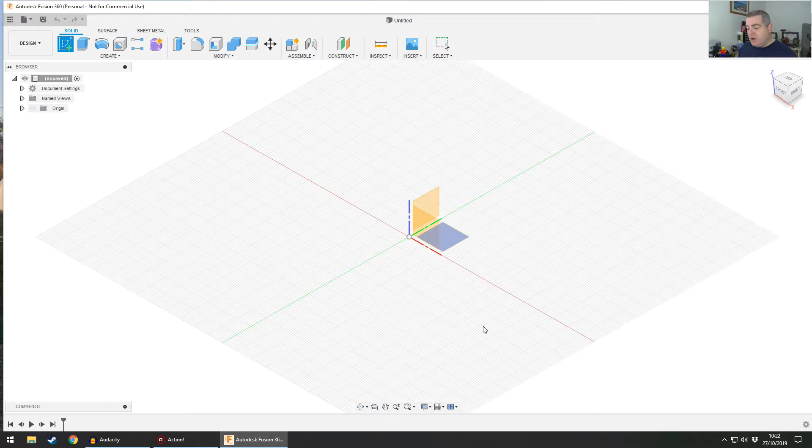So, as we learned yesterday, the first thing we need to do is sketch on any plane. Doesn't really matter, I'm going to choose this one today. And I'm going to choose a rectangle, and a rectangle is 2 points, so we click and click, and that's it. Now, different to the last video, we're going to start using this sketch dimension button. You can press D on the keyboard to get that up, or you can also press S on the keyboard. That's S for Sierra, and it brings you the shortcut menu, and you can pick dimension from there.

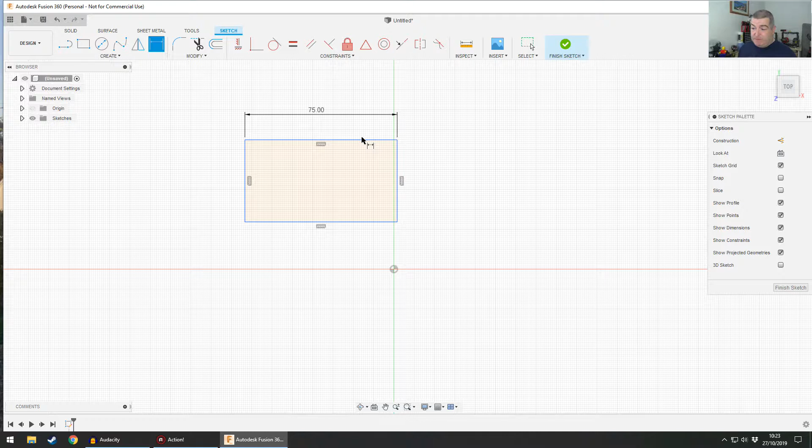So I'm just going to click the line, click the dimension, and then type in 75. That'll do. And then, you can see by the little symbol next to the cursor, we're still in dimension mode. So we click again and we click again, and there we're like 50, no, not 520, 50. There we go. And we've got this rectangle, and then I'm going to press escape to come out of dimension mode, and I'm going to finish my sketch there.

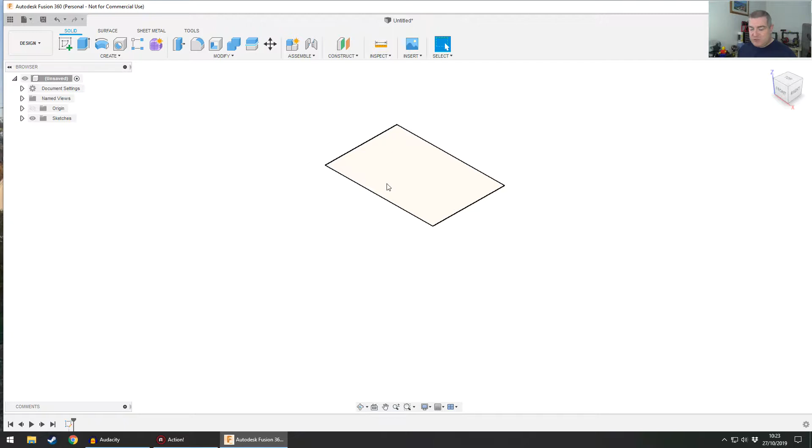Now you'll notice I just shoved that sketch anywhere. It doesn't really matter what you try to do with this stuff at this stage. Maybe in a minute we'll talk about that, but at this stage, who cares, right? So we're going to extrude this because we need to give it some height, and I'm going to give it, say, like 30 millimeters. So we can type that in there, or we can click on the dimension here and type it in. You can do whatever you want, or you can just drag it up and type it in.

So now we've got a brick, maybe, yeah? I'm going to call that a brick. And it looks really, really crappy. Okay, fair enough. So what we do next is we want to hollow this thing out. Now there's a couple of ways we can do that.

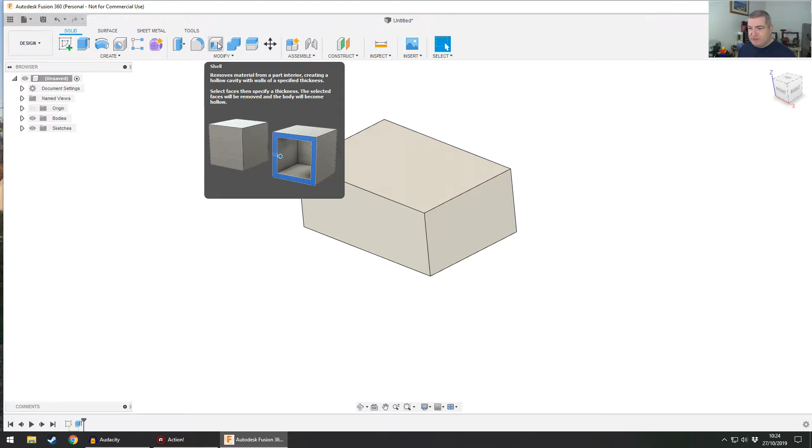We can press this button here that says shell, and if you hold over it, it basically says it'll remove material from the interior part. So we hit that, we literally say that face wants to be removed, and I want the wall thickness to be, say, 3 millimeters. And hey presto, we've now got a box which has all the walls of 3 millimeters, which is quite nice. And if you look down here, you can see we've got a little shell, which is pretty cool, but not really that impressive.

So one of the nice things you can do with 3D CAD, this is across the board for any 3D CAD software which is structured, you know, SolidWorks, Pro Engineer, Inventor, Fusion.

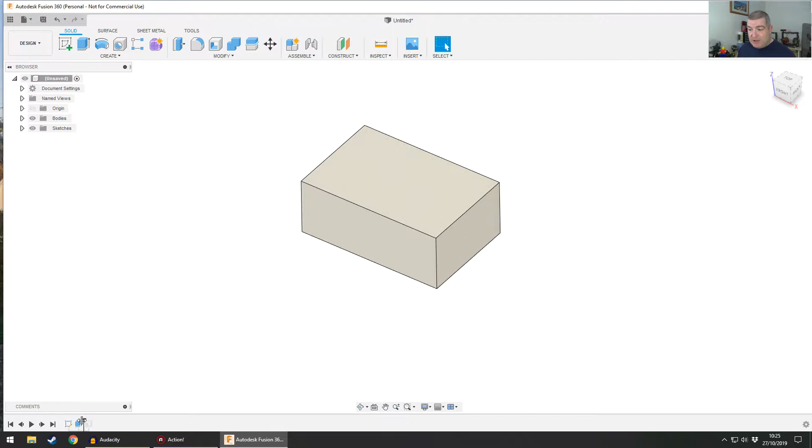We can take the rollback bar here, and we can slide it back, left click and drag it back, and we can temporarily remove the shell from the timeline or feature tree or whatever you want to call it. So let's say I wanted to round the corners of this box off before we apply the shell.

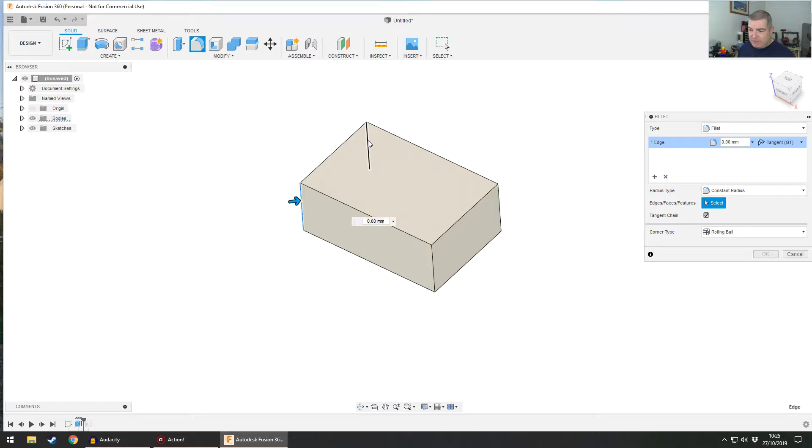We use this tool here called fillet, and all I'm going to do is I'm just going to click. If you point at a line that's hidden, you don't have to turn the model around. It will allow you to click through the surfaces, which is quite nice. I'm just going to click all those 4, and I'm going to drag this in, and you can see what happens. We're going to round off the corners. And I'm just going to do a generic 5 millimeter round.

Now, if I then take the rollback bar from the bottom left and drag it back and bring the shell back into play, what you'll notice is the shell has now incorporated this round in it. And that is why you have structured CAD and parametrics and all those buzzwords that people use. It basically just means that whatever we build in this line starts left to right, and the things on the right depend on the things from the left.

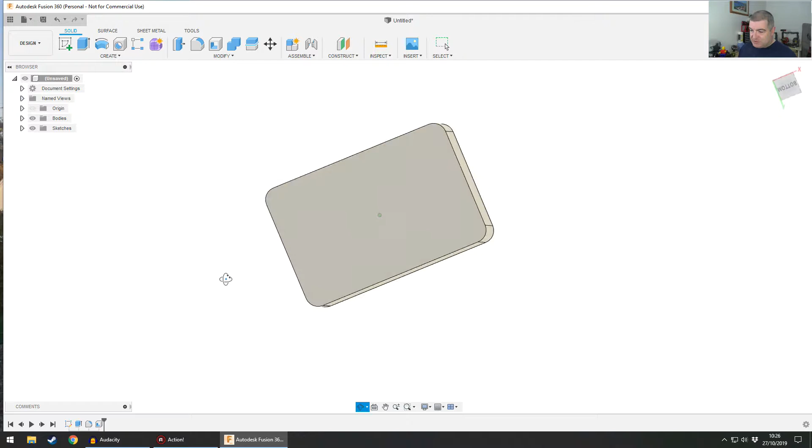So we've now got our box, but it wouldn't really be much of a box if it didn't have a lid. So to attach a lid, we're probably going to need some kind of lip to allow it to slot in. Now, the way I'm going to do that is I'm going to click sketch, and I'm going to sketch on this face here. It should turn blue. There we go. And it turns it around so we can see it. Now, I don't want to have to literally sit there and go, okay, line, curve, all the way around here, because that's just going to be tedious and shitty.

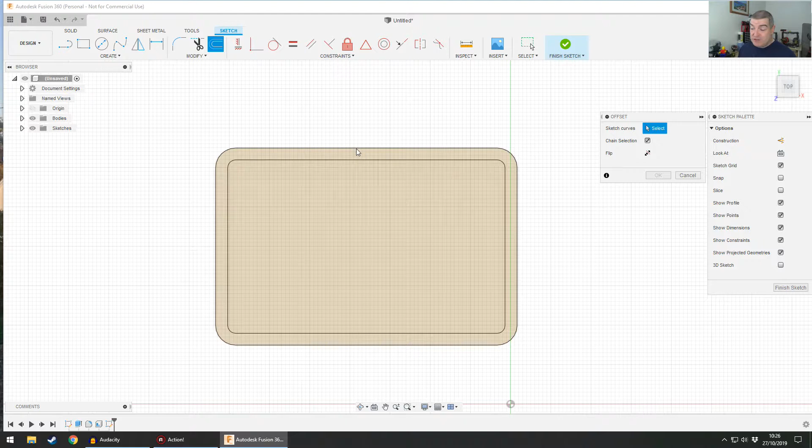So there's a command here called offset. It's next to the scissors that we used last time. So I click offset, and then I click one of these lines. Doesn't matter whether it's the inside or the outside, depending on how you want it to be offset. If I click the inside one, I can then drag this, and it will literally take the geometry from the line I clicked, and it will offset it by a value.

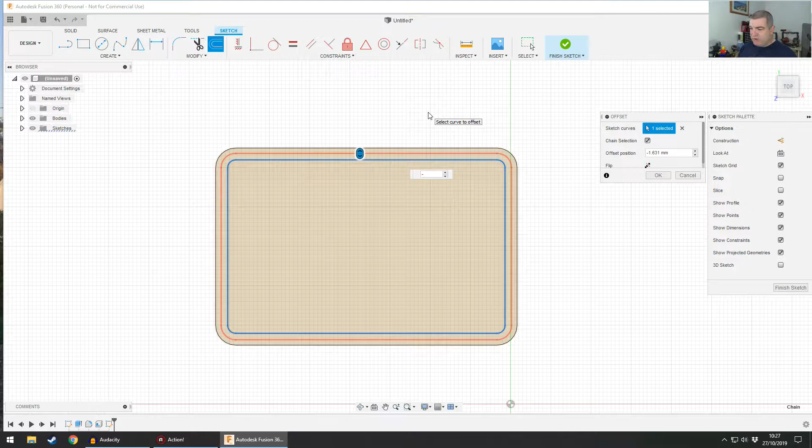Now I want to go this way, and for some reason this way it's a minus value. Thanks for that, Autodesk. And there's a flip button here that we can press to flip it, which just takes the minus value away. But for some reason the direction I want to go is minus. So I'm just going to type in minus, if I remember rightly, that was 3 thick. So we're going to do 1.5 to go halfway, and then we see we get a little automatic dimension added.

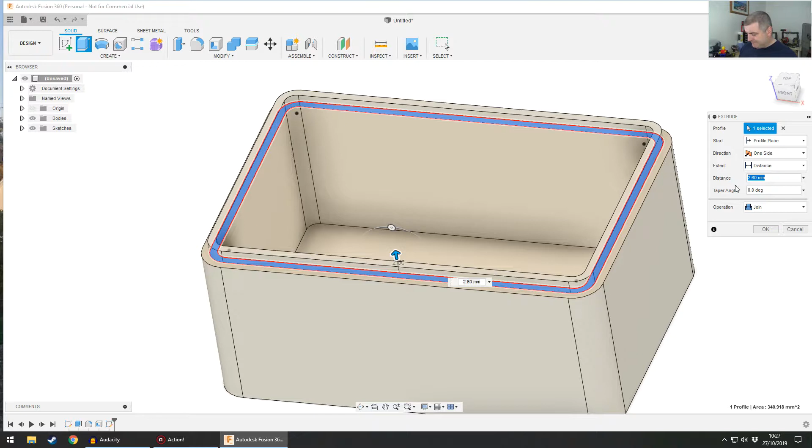Okay. So if I just click finish sketch and then extrude, what we learned last time again was we can pick either one of these regions to extrude. So I'm going to extrude the internal one, and I'm going to extrude it up by like 2 millimeters or something. The design for this box is just in here. I'm just making it up as we go. You can do whatever the hell you want with your box, and you'll get somewhere pretty fast. You can see there our model tree has like 2 sketches and 4 features in it, and we've got the bottom half of our box, which is pretty nice.

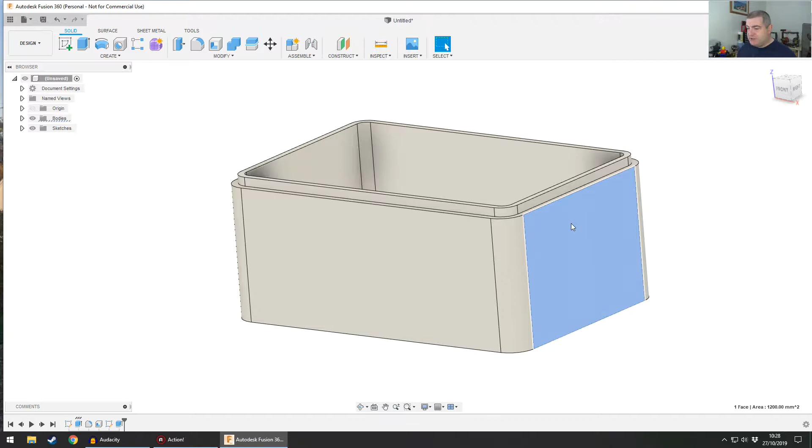Now, I might want to put some kind of latch mechanism on here so that when you attach the top of the box, it clips in place. And how am I going to do that? Because we said last time you have to click on a face to sketch on it, and there's no face in there that I can click on. Now you can do a couple of things.

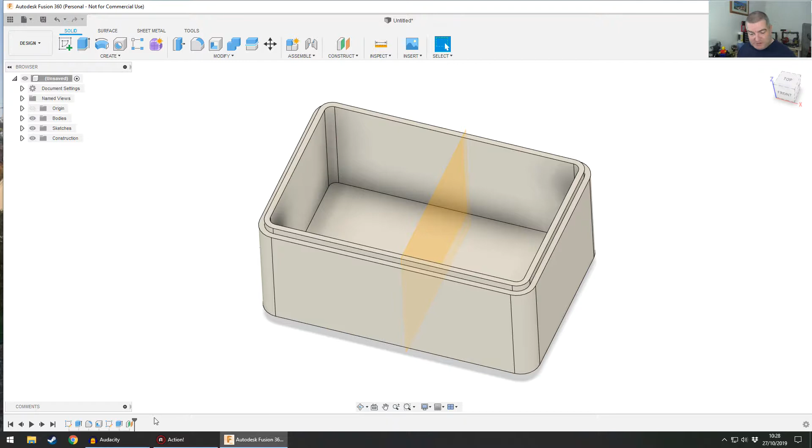So to take the mathematical equation out of this, what I'm going to do is I'm going to go back to my very first sketch. Remember that one? We just did it a couple of minutes ago. And if I do edit sketch, we can see here that this rectangle is blue, and it's just chucked in somewhere in the middle of space. And if I grab a hold of the corner, you can see I can actually move the entire rectangle round in space, which is probably not that great in this occasion.

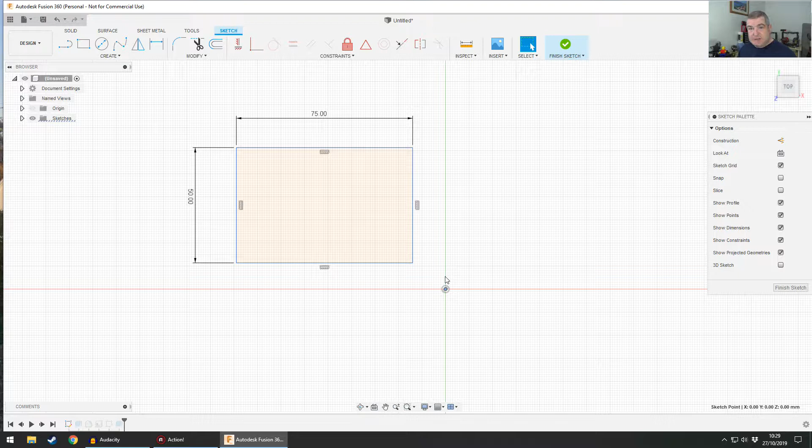This dot here is what we call the origin. Now, we have the 3 planes, the front, the side, and the top. And where those 3 planes intersect, that point is called the origin. So that is here. So we can imagine that this green line is one of those planes, and this red line is another one of those planes. And if I was to spin it round, and if there was a 3D line sticking out here, that would be the other plane. So what is probably the best idea with this box is to put the rectangle so that the dot is in the center, right?

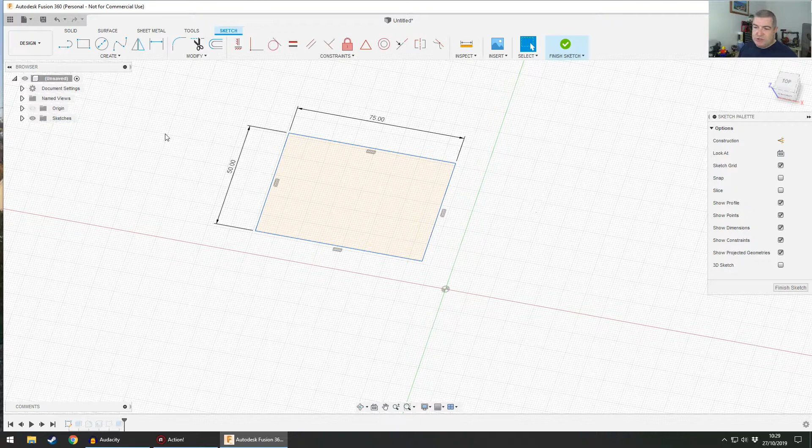And what we can do is we can draw a line from the corner to the corner of the rectangle. Press escape to end that command. And I can click that line, and over here on the right hand side I can click this construction button. And what the construction button is, it turns the line dashed. And that doesn't split the rectangle into 2 regions. That just allows us to use that line to line stuff up.

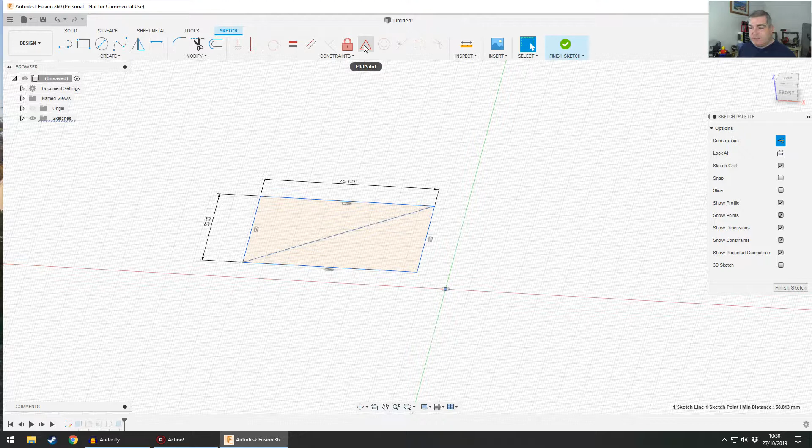Now if I click that line again, hold down shift and click the origin, what you'll notice is we get this triangle constraint called midpoint. And if I click it, what it does, I'll just turn the view around so we can see. What it does is it allows us to put the exact middle of this line onto the origin. So we've now got our box exactly where we want it in space.

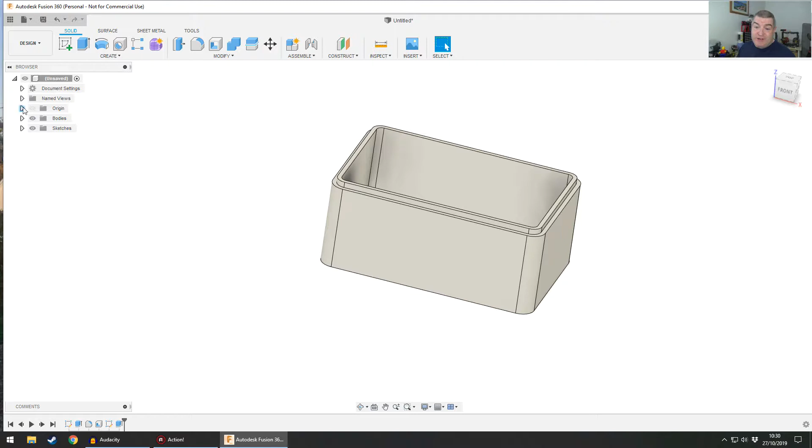Now if I just end the sketch, you'll notice that absolutely nothing has happened. So that was totally useless, right? Well, wrong, actually. What we've done, if I expand the origin and I click on these planes, what you'll see now is that our plane is exactly through the middle of our box.

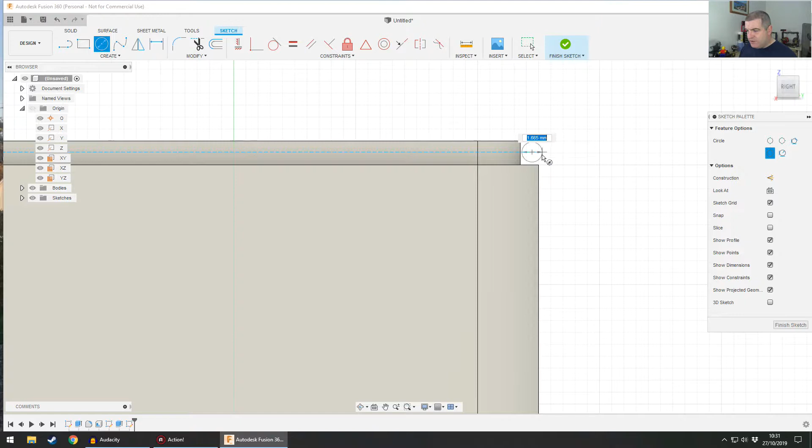So I can sketch on that plane and it turns the box around, but if I go up here and I go circle, well, somewhere there, and then somewhere there, you see that dashed line that appeared? That's like literally relating the two circles together. So it's clever enough to do that.

But what I really want to do is I really want to select one of the circles, hold shift, select the other, and say horizontal. Can't. Maybe it's already applied. No, it's not. Ah, you've got to hit the center of the circles, of course. Autodesk. And then hit the line of the circle, and then the line of the circle, and say equals. So what we've got now is we've got two circles. I can't move them. And they're the same size. They're all linked. Parametrics is great.

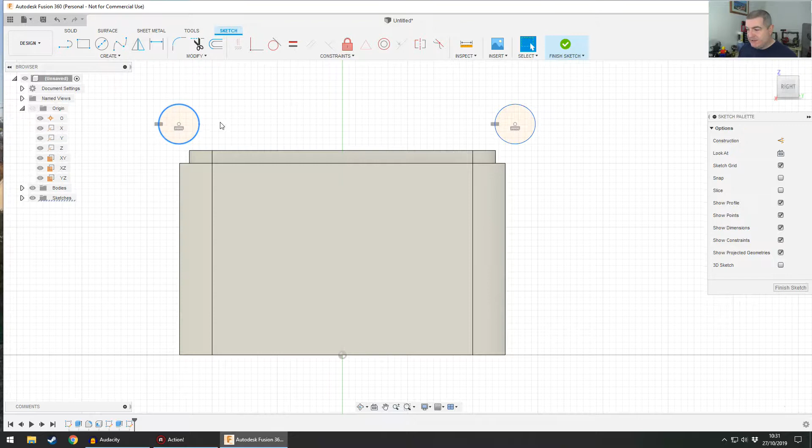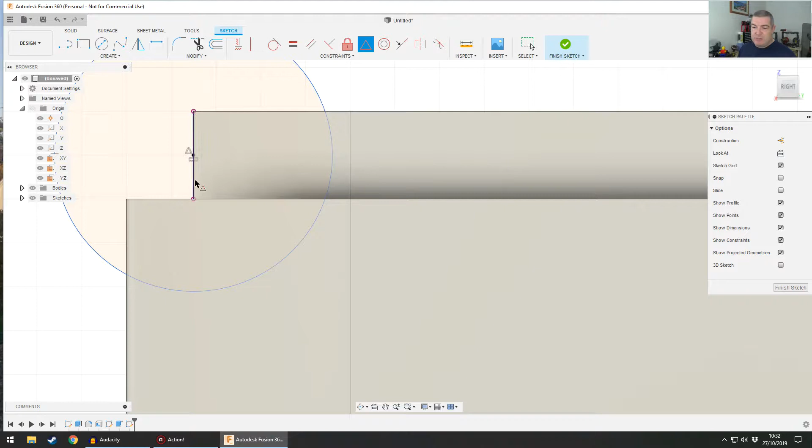Now what you might find is we can click this line here, but that's not a line, that's just a face. Well, when you look at the end of the item and it turns out a line, you can then use that line and we can do midpoint on it. You see you get these like weird kind of purpley pinky circles. That's what we call temporary geometry. So that's just literally Fusion saying, okay, I'm going to use this temporarily because that's what you want.

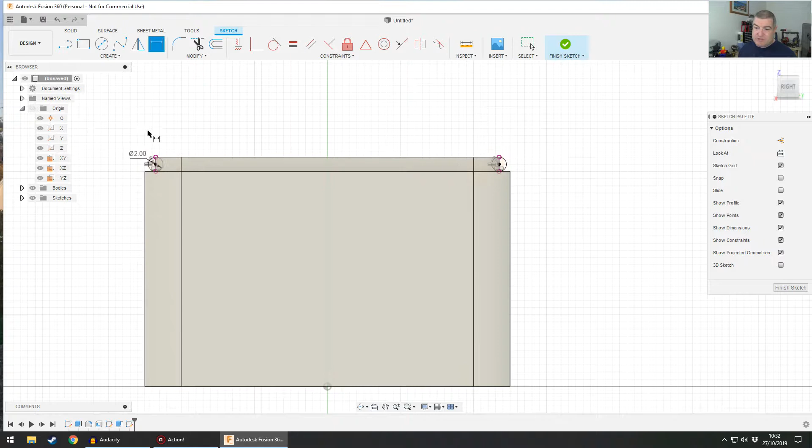And I'm going to go across to this side and I'm going to do the same on here. So I'm going to go there and there. Nice. So now the only thing that we can't do is move the lines. The only thing we can do is change the size. Now I'm going to press D and I'm going to add a dimension for that line and I'm going to make it like 2 millimeters in diameter. That's too big. Double click the dimension again, make it 1 millimeter in diameter, and we get this little circle here.

Right, okay. Now if I click finish sketch and turn it around, what you'll see is that is exactly what we wanted. We wanted that sketch to be on the center or the middle of that face. So we can of course go back in and we can extrude these things out. I'm going to click them both and I'm going to show you what happens.

So if I get a hold of this extrusion line and drag it, I hope you can see that we've got some geometry coming out in one direction. Now that's good, but we might want it to be kind of equal in both directions, using this as the midpoint. So what we do is instead of having one-sided, we can go to symmetric.

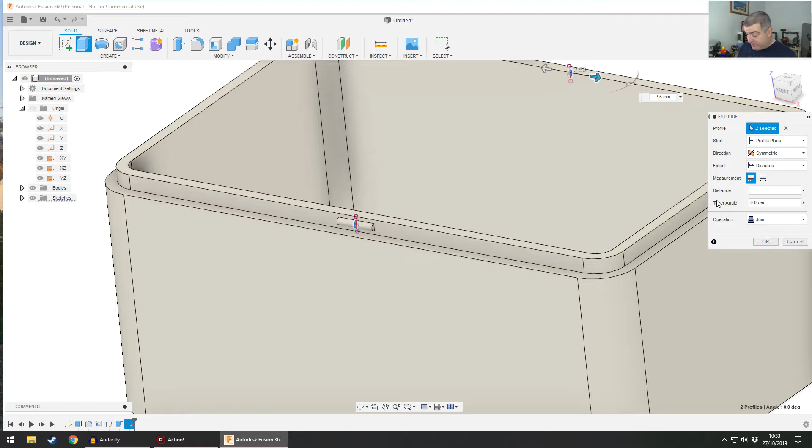And what we can see now is that it's extruding one way our dimension and it's extruding the same amount the other way. So if I wanted this to be a 5 millimeter feature, I would change that to 2.5 millimeters, or 5 divided by 2, and we get this little cool feature in here.

So when we create our very first sketch, I'll just edit that sketch so we can see it. It might be important where the origin is. Okay, this is all what we call design intent. It's how you intend to use the geometry and use the base features, the origin and those original faces, those original planes, how you intend to use them within your model.

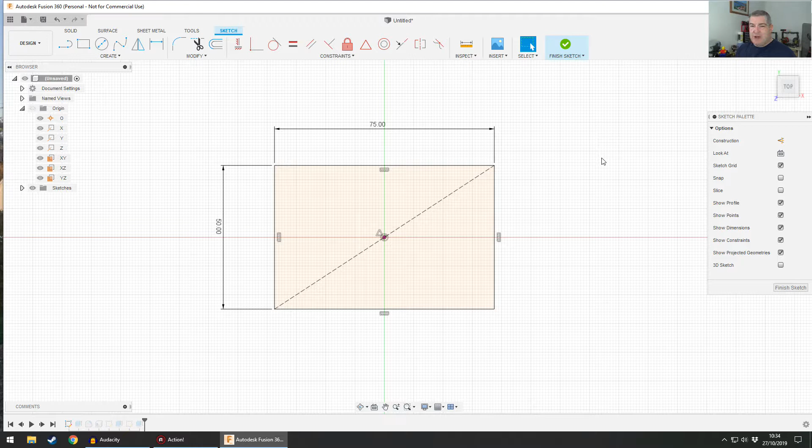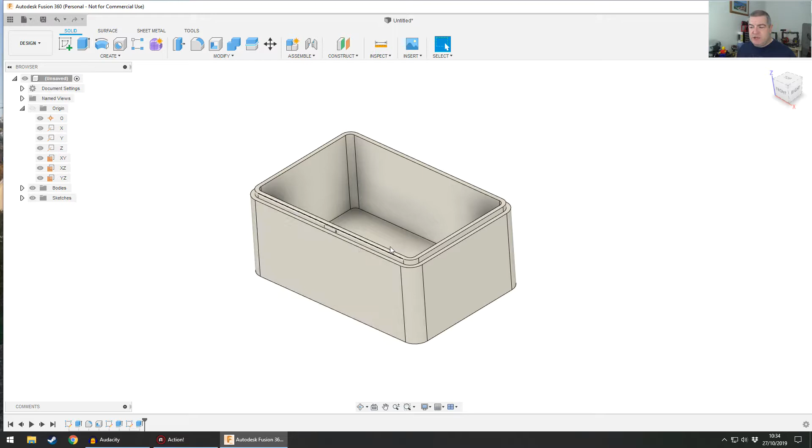Now you may do what we've just done and you may think, all right, I've created some stuff and I need to go back and change it. Well, you can do that. You just saw we can do that. Not a problem. So we've got the bottom half of our box and we can now 3D print that. It might be nice if the box had a top, and it might be nice if we could have the top of the box in this model so that we could see if it all fits together, right? Okay, so I want to create the top of the box.

So what I'm going to do is create an assembly. Now, Fusion is a little weird with assemblies because in every other CAD package you use, you create parts and you save them out and you bring those parts in and you amalgamate them as an assembly and you create relations between the assembly. Fusion's different. You create all of your parts in one piece of space and then you constrain them together. So we're going to have a go at this.

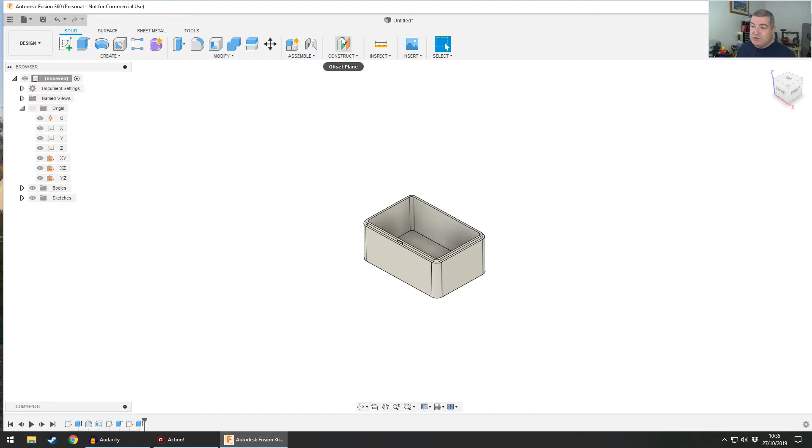So what we need to do first of all is we need to say to the assemble menu, we need to have a new component. So we need to identify this as a new component. We press OK, and you'll notice over here we now have component 1. Okay, I'm just going to go back up to unsaved, which is the actual file. I'm going to reactivate that by clicking the dot so that if you activate component 1, whatever you create is part of that component.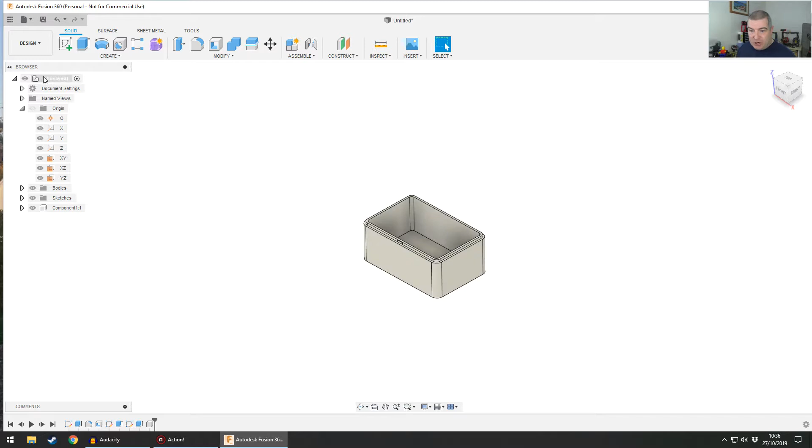Honestly. So you have to go back to the top and activate the actual file that you're working with, and then you're not creating things in that component, so we're going to create another component. That doesn't make any sense. I know, it's just the way Fusion works. It's crackers. Anyway, I'm going to create another sketch.

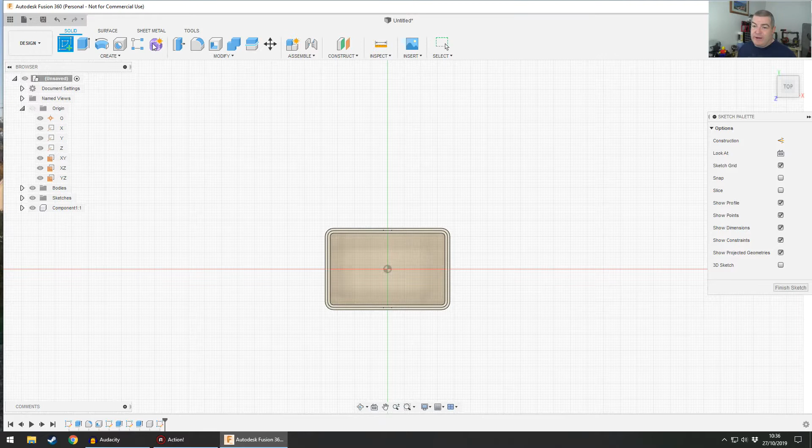I'm going to put it on this bottom plane, and it's going to be, you guessed it, a rectangle. I'm going to shove it up here. I'm going to press D, and I'm going to give it the same dimensions. You can relate these dimensions together if you really want to. I'm not quite sure why you would want to, but you can. What I also need to do is create this around the origin as well, because we need to reuse that center plane, but I'm going to do this slightly differently.

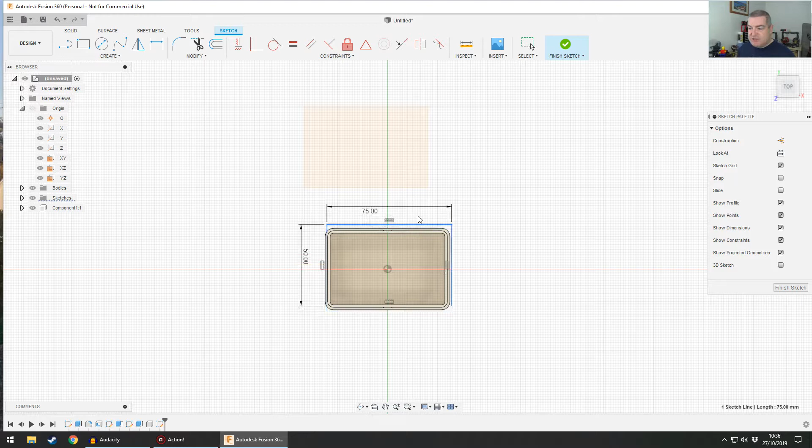I'm going to draw a line from the origin up to the midpoint. You see the triangle appeared there, to the midpoint of that line. I'm going to make it construction by clicking the construction over there, and then I'm going to make it vertical. So again, that has made it vertical with respect to the origin and the planes, because we might want to reuse that plane. The height from the origin, I don't care. I'm not really bothered. So I'm just going to leave it.

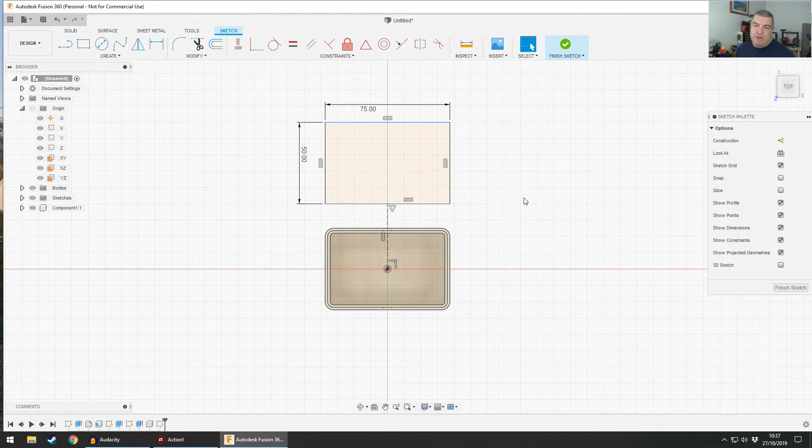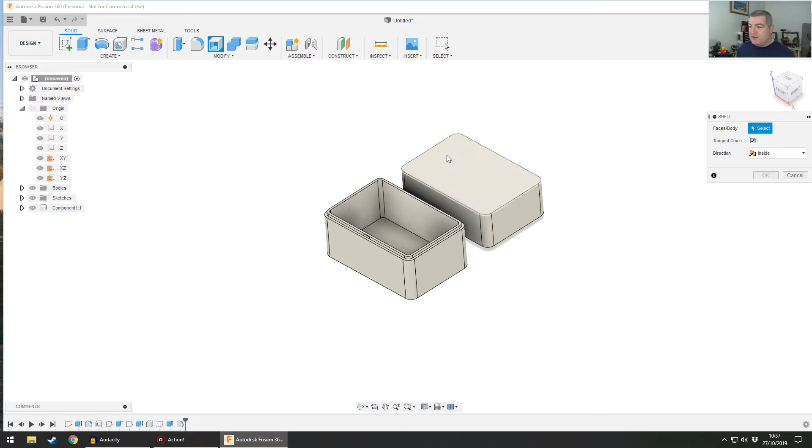So we finish that sketch and we do yet another extrude. Let's choose that region and let's go like 25 mil. Let's add our fillets to the outside again. I think, if I remember correctly, our fillets were 5mm. And let's shell it again. Or let's not shell it. Let's do it a different way. Let's sketch on the top. And let's offset that outer sketch inboard, which was a minus number for inboard this time. Thanks, Autodesk. Minus 3mm.

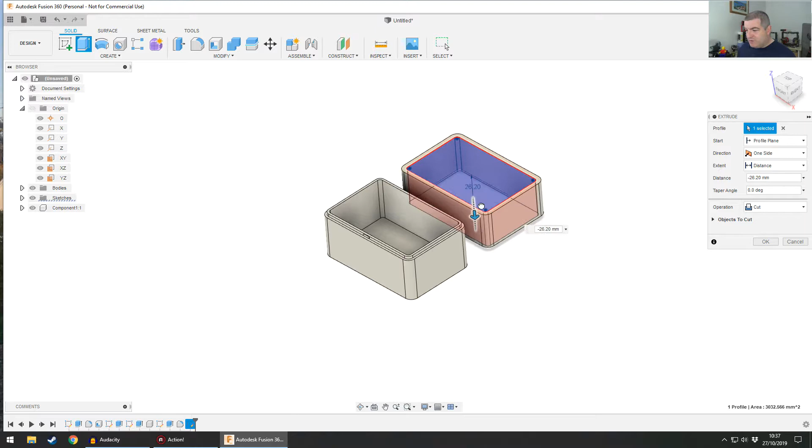And then let's extrude that down over. Now what you'll find is you can go right through and cut a hole straight through your box.

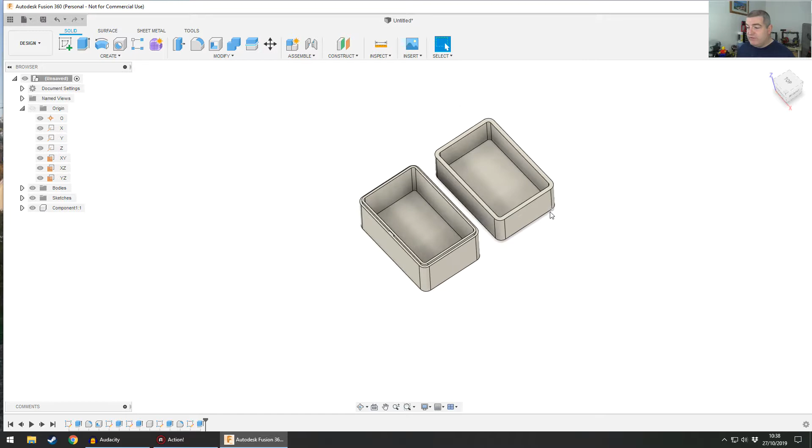So what you have to do is remember what your original dimension was, and it was 25. Take away the 3mm we want for the wall, so that's going to be 22. So we do minus 22, and that's just another way of creating a hollow box. It's not quite linked parametrically the same way as shell is, but hey, who cares?

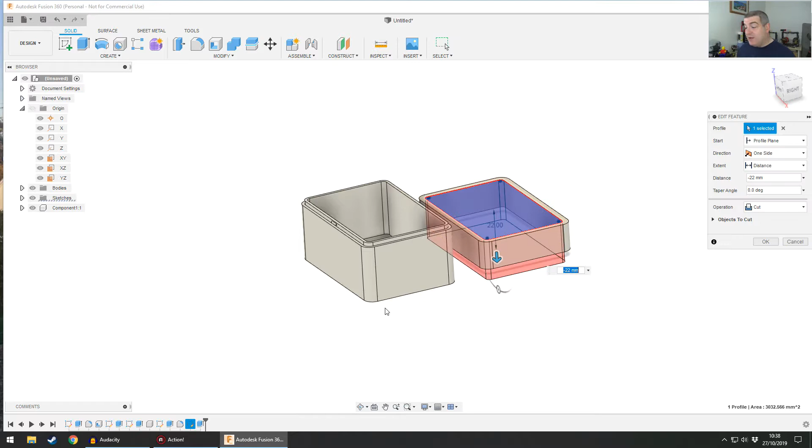I'm actually looking at that thinking it's a bit too thick. So what I really want to do is go back to there, edit that feature, and let's just go for, say, 15. Oh look, we've cut a hole in it. So we go back to our cut, edit that feature, and say minus 12. Welcome to the world of 3D CAD.

It's awesome. So what I need to do now is sketch on the top of this lip. And if I remember rightly, this one was on the inside, so this one probably wants to be on the outside. So we're going to use offset again, and go minus 1.5. Finish the sketch.

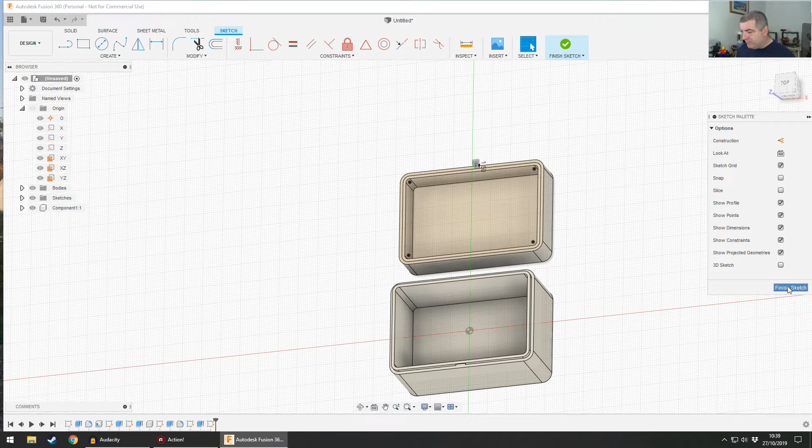And I'm going to extrude that up, so it's the outside region this time. I think it was 2mm again. Yeah, that looks okay. So now we've got a lid for our box.

And we need to add, you know how we added this little lip feature here? We need to add a little groove to put that in, right? Well, let's see what happens, because this is going to be a little more interesting now.

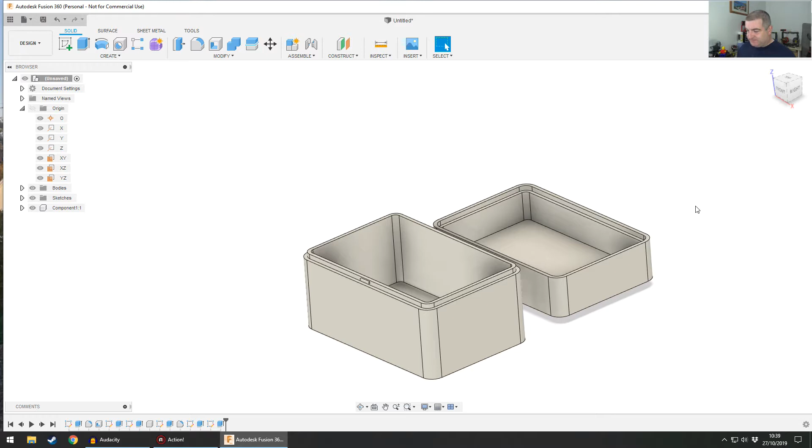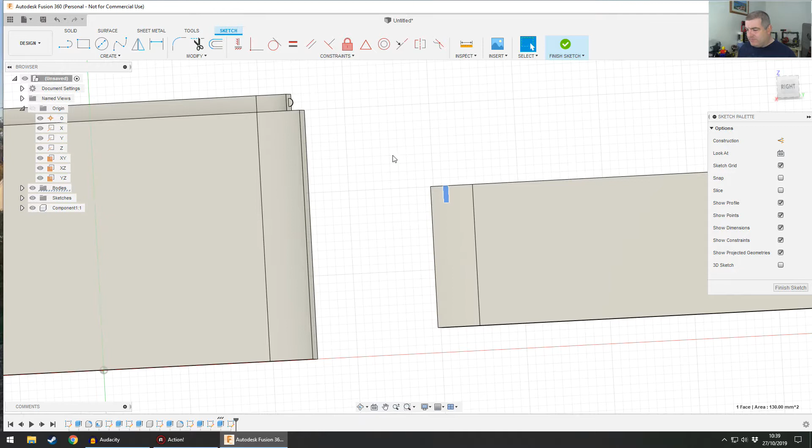If I want to create the groove, I need to create a sketch on that plane, because we said we wanted that sketch to be on that plane. But we can't actually see where we're drawing anything, because there's stuff in the way. We want to be in here somewhere, on there, and we can't see it. So if I just finish that sketch, it's blank, but we'll edit in a second.

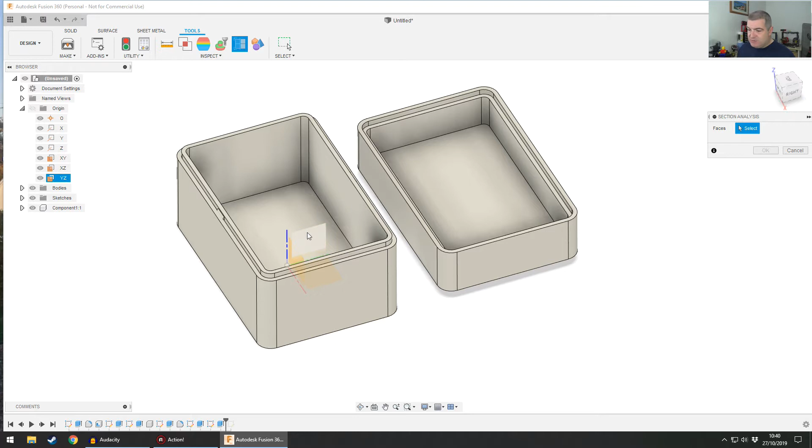And I move that back to there. What we can do is use the tools menu, and use something called section analysis. In every other software I've used, this is called cross section, but in Fusion it's called section analysis for reasons that can't be fathomed. We just click the button, and then click the face or the plane. Or we can cancel that and click that face there.

And you can see, if I press OK, we can now see what we're supposed to be doing. So if I bring that sketch back into play and edit it, we can create our circles. I'm just going to create these circles the same way as I did the last one.

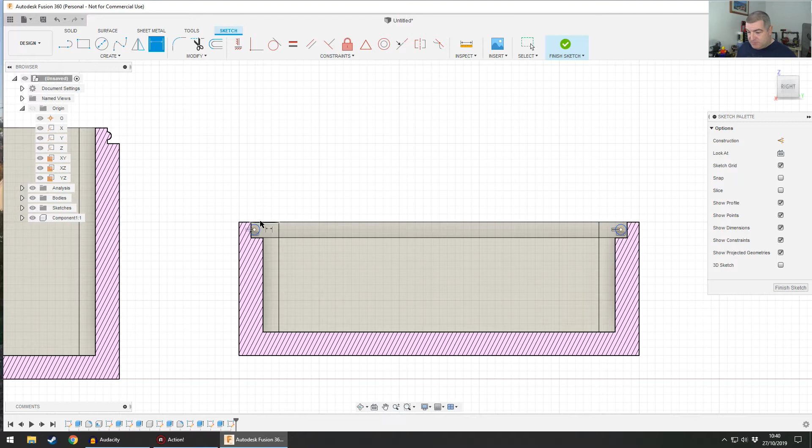Let's have those horizontal, let's have them equal, let's put a dimension on them. I think it was 1 mil, wasn't it? And then let's put the center of that on that line, and you can see now that we're in section view, we can reuse that line again.

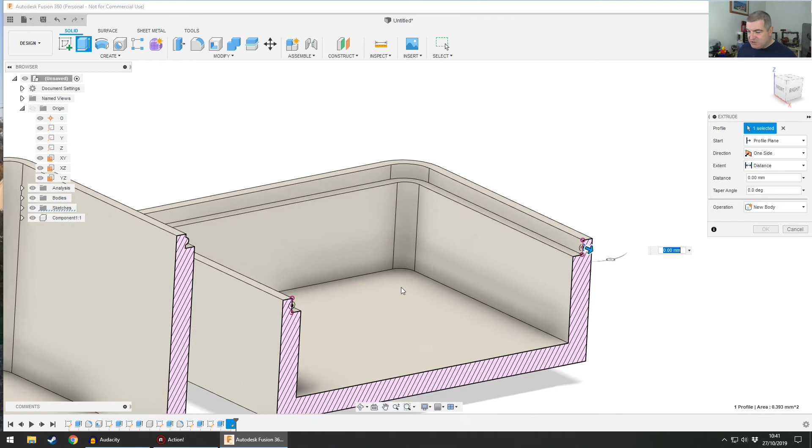Right, let's finish that sketch, and then go back into the solid menu and do an extrude. This time we want the region that's inside, because we need to cut a slot to receive it. Again we're switching from one side to symmetric, with a distance of, I think it was 2.5, wasn't it? And you can see now that we've got this cool little cutout in the side of our box.

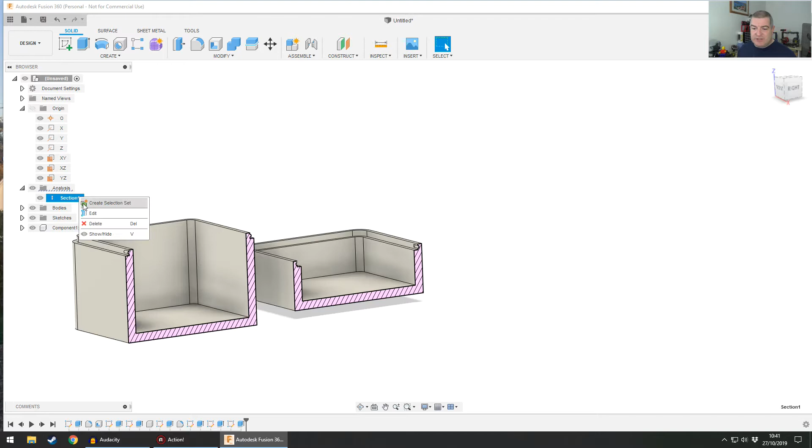Now, to get rid of this section view, bizarrely, we have to go to this analysis thing over here, expand it, right click section view and say show hide, or press V to make it hidden. The reason I'm hiding it and not deleting it is because we might want to use it again, and it saves setting it back up.

So now we've got our box lid, and we need to tell the system that it's our second component.

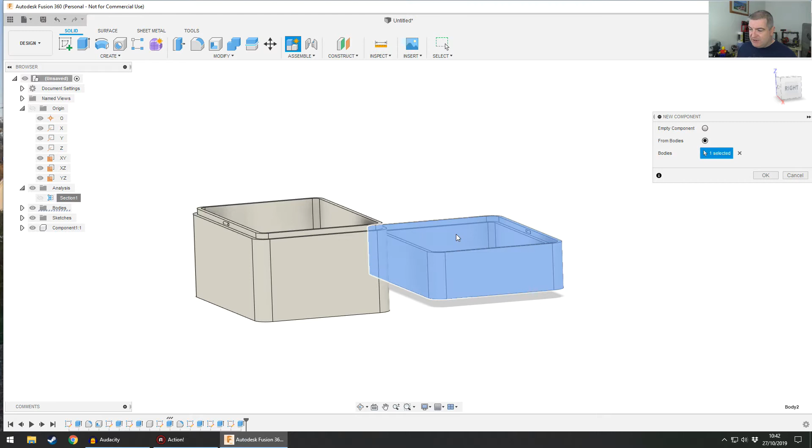So again, we go to new component, and instead of clicking empty component, we click the from bodies button, click this body of the lid, and say OK. And then what we'll find is, after a short delay, we have two components. Pretty nice. And what we can do is drag these components around the place, or drag one of them around the place anyway.

You'll notice this position box appears as soon as you start dragging stuff around, and that just allows you to capture the position or revert the position back to what it was.

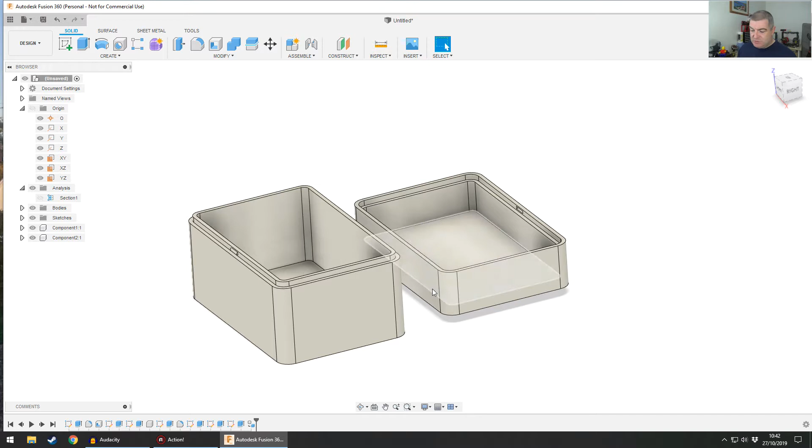So we now need to assemble our box to make sure everything fits and lines up okay, and what we do is we use this joint button.

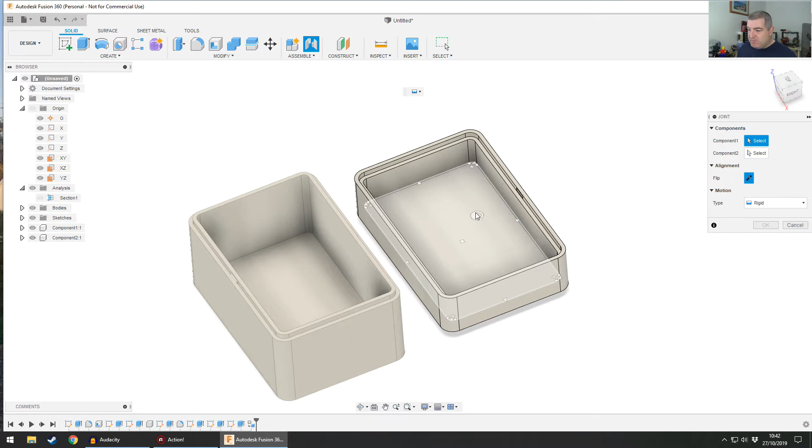The joint button in Fusion is absolutely despicable. It's terrible, absolutely terrible. What we do is click the button and then point at a face, and you'll see all these weird dots, squares, arrows, and this kind of weird round cursor that appears. Now, it's all very important stuff.

If we click on the side, you'll notice the cursor changes its orientation, and the half circle on it moves around.

Don't worry about it. What we're going to do is just say to our box: on this edge, in the middle point, I want that to align with this edge in the middle point.

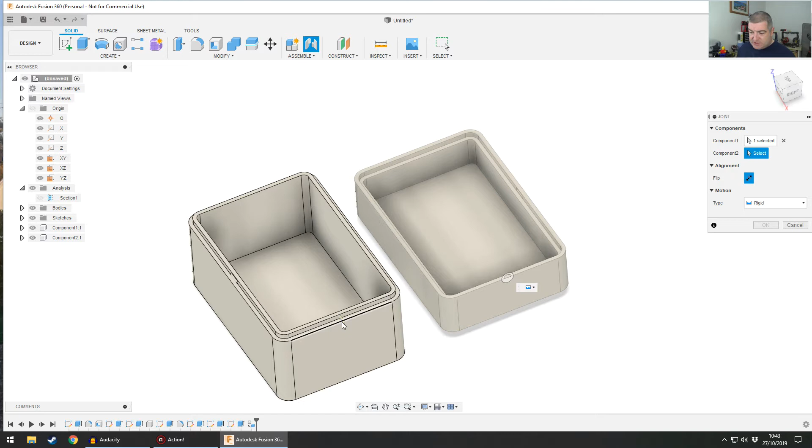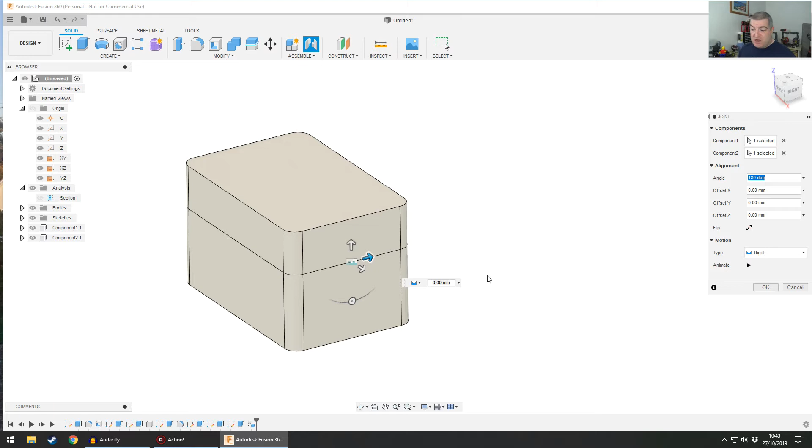And what you'll find is your box turns over and wiggles around for a bit, and then it asks, is that right? So we now have some buttons here where we can flip it, and then rotate the angle 180 degrees, and here presto, our box is now assembled.

But what we might want to do, if I press OK on that, is go back to our section analysis and show it. We can see there that our little feature matches up, and it's quite nice, and you can see it colors the two components different things, which is pretty cool.

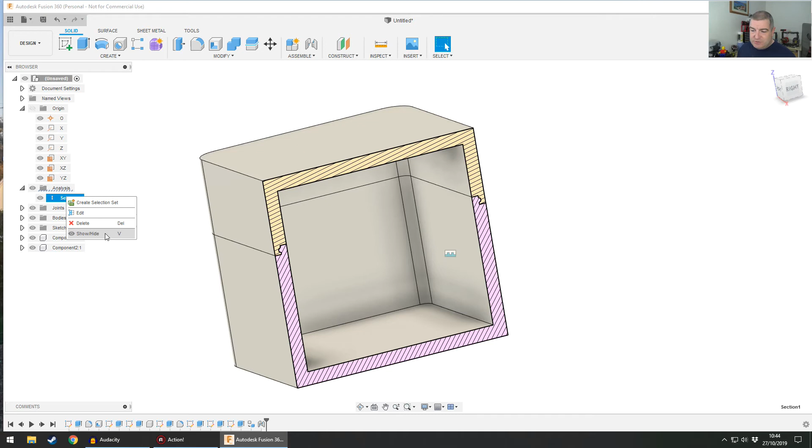If I wanted to hide that again... now let's say I wanted to move the lid - no, you can't, because this little icon here is telling us that we put a rigid joint in there. Handy. And what it's done is lock out all 6 degrees of freedom, so it can't slide in any direction, it can't rotate in any direction, which is handy.

So I'm going to edit that just by clicking on it down here in the model tree, and I'm going to say edit joint, and where the type is, I'm going to change that to a slider.

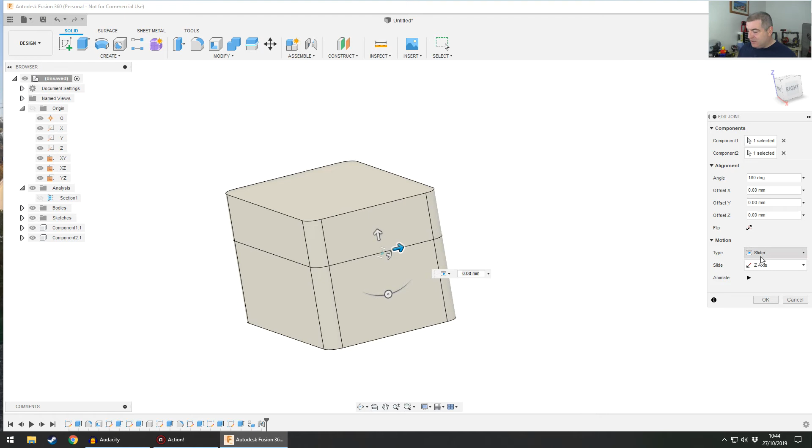And now it's going to animate what direction we're sliding in, and we're currently sliding in the Z-axis, so - don't want to slide in the X-axis, no, don't want to slide in the Y-axis, yes - and I am going to click OK.

Now what that allows me to do is click my lid and slide it up, and if I reactivate my section view, I can click my lid and slide it down, and see exactly what happens. You can slide it through the components.

There's probably a way to limit its movement. That's far too advanced for what we're talking about right now. This is literally just creating a box with a lid using the geometry, the planes, how you would consider design intent, and then how you would get things to move in your little assembly.

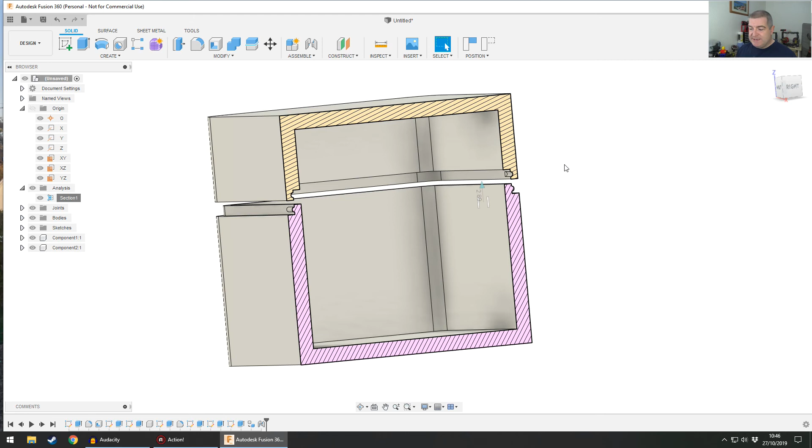You've got to understand you can't do this stuff in 5 minutes. You know what I mean? It's not possible. Well, I could fast forward it and talk with a squeaky voice, but no, it's just not possible.